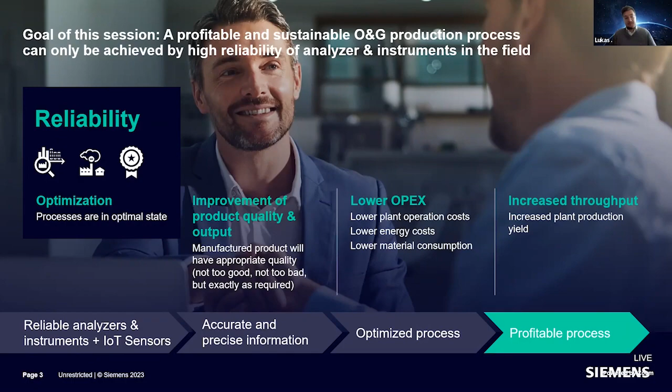So any process control relies on information provided by sensors, classical information, temperature, pressure, flow, level in the plant, and information from gas and liquid analysis of the composition of different measured components. So you can really optimize your process. You can control if your quality is good enough, if you fulfill environmental requirements. You can check if your explosive gases in the process are too high, for example. So we need every piece of information for a process, and we have to make sure that the process control can rely on this information.

I often see in various plants that there's some kind of misunderstanding. Process control expects this information. On the sensor level, it's not possible to provide this information always accurate, always available. So process control starts to ignore some information, which reduces the quality and quantity of information used by the process. And of course, in the worst case scenario, this has a negative impact, because there was a reason why these sensors were installed in a process, why they were purchased by someone.

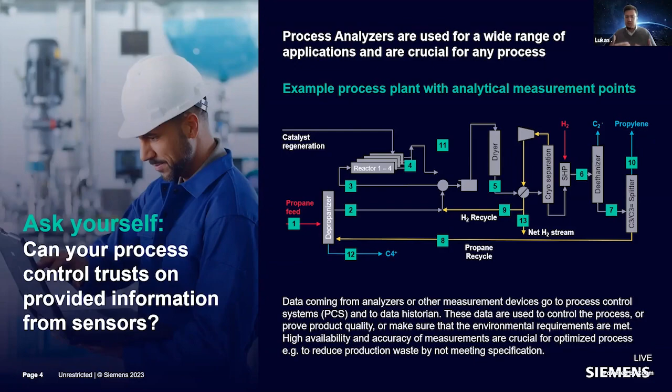So if the process control starts to lose trust in the provided information, this will have quite a crucial impact. So I say today, most of the processes in the world cannot really trust the sensor information in the field. And that's from several perspectives. We have sensors which are sometimes failing. Information is not available for the process. The typical example is run-to-failure: the sensor is broken, control doesn't have the information, and it could cost you millions.

We have sensors out there which are very, very complex, and we will see it later. And they have to measure very accurately. So they're measuring parts per billion or parts per million. So if they have only a small deviation, the information is not really usable by the process.

So if the measurement is not correct or not close to the reality, it's a problem, right? And of course, many sensors are impacted by the environment. I saw sensors there having problems with humidity, with dust, with ambient pressure. So all these topics also impact sensors.

So if you have unreliable analyzers, instruments, or other sensors, you have problems. The process is not running in an optimal state because your process is working with wrong or missing information. The quality is not good. You may have higher operational costs, or your process yield might be lower than expected.

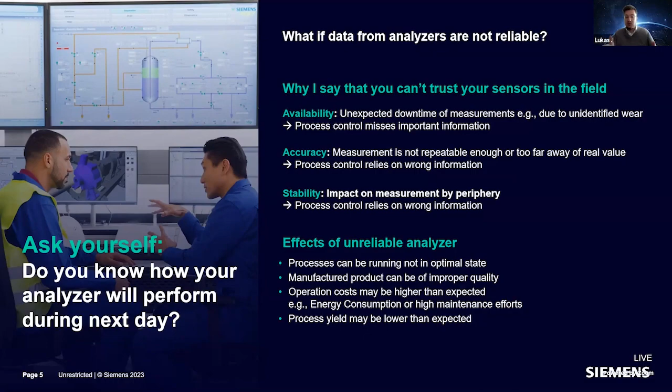So I want to give you 4 examples of what we can do on a sensor level in the oil and gas industry to optimize the information provided by sensors and to contribute to process optimization. The first topic: we had a customer with gas analyzers and liquid analyzers in the field in one of the big ethylene plants worldwide. And there was a topic of accuracy. We will come later to what exactly it means. But first, let's look into the process.

In many processes, we have the challenge between quantity and the purity of the produced chemical composition in the end. If we produce more, the purity goes down to a specific point, and that is a challenge we have to solve. Of course, we want to improve the quantity or the quality, depending on the product. But if we want to optimize the quantity, we have to make sure the product still fulfills the minimum quality specification.

And we often see that customers define their process set point with a high safety tolerance, in such a way that they know the sensor is maybe not providing exactly the information they need. I maybe do 10% additional on top of that 20%. So I have a big space, because the process information is varying. And they drive the process like this, and it's working, it's fine. But there's a big gap of information not used.

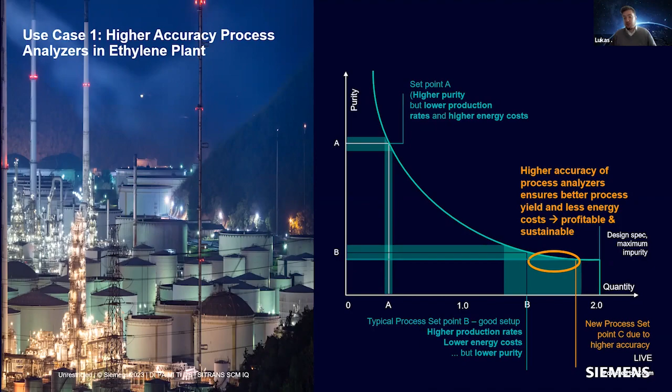So let's look into one of the use cases. For example, a gas analyzer in the field, which is measuring a lot of compositions. This kind of analyzer has to be checked on a regular basis. This complex device has to be checked every week at minimum, sometimes even every day, because it is impacted by many different conditions. You have to ensure the measurement is accurate. If that's fulfilled, this gas analyzer or liquid analyzer provides really helpful information for your process.

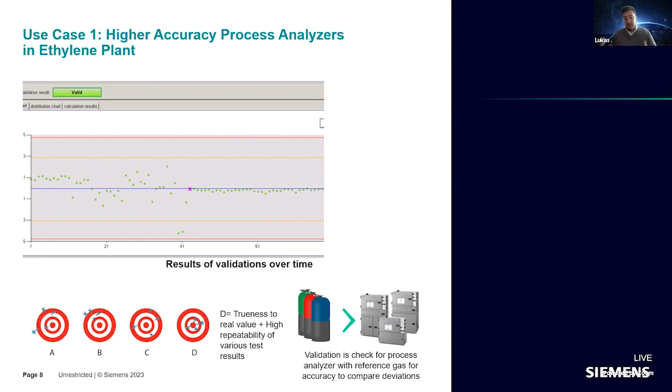And what we often see is that we are far away from the real value of the process, and the measurement is not repeatable. So what we have done with this customer is first optimize the way he checks the accuracy of his analyzer. We optimize the way he provides a reference gas to the analyzer, to really check how close the measurement from this analyzer is to the known composition in the gas.

So we are optimizing this task here to do that in a frequent way and often every day. And then we are applying statistics on this collected information, using the potential of statistical quality control. So different control charts like CUSUM, EWMA, Shewhart charts known from the process control side, applied here on quality data, and applying different statistics well known from statistical process control, rules like the Western Electric ones,

as an example. We are applying this statistic on this data, and what we identify here, and you see it in the screen, is this pattern: we have here a really abnormal pattern of data, right? The green points are validations every day. So we are seeing this data fluctuating a lot, which would normally not be recognized by any human technician in the field. But software can identify it.

If you have 10,000 of these routines done every day, a human technician cannot do that. A software can do it, and the software recognizes here, hey, we have really an unusual pattern, right? Fluctuating points up and down, sometimes not really normally distributed. And then, of course, we see the first points are violating some limits set by the user, so it's getting

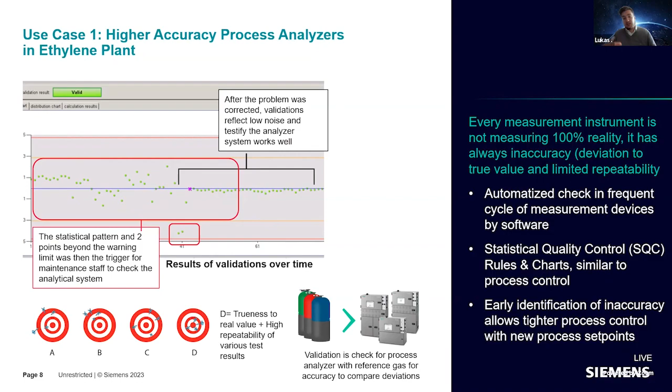critical. Normally, the process would just run with this information. The analyzer result could not really be used because it's not accurate enough. So the process would maybe stop, maybe ignore the information, maybe work with wrong information. So this would be one of the problems we see. And with a predictive maintenance approach, you can really identify this type of issue in the field.

And what we have seen with customers using this approach only for gas and liquid analyzers in the field: they had savings of more than several million euros per year, in such a way that they could improve their process output. So optimizing the accuracy of complex sensors in the field can provide several million euro higher process output every year.

And the cost of the implementation, we are talking about 100,000 euro, maybe 200,000 euros. So far, far low for the hundreds and thousands of sensors in the end. So we see here within the field of sensors a value add: you can optimize the process output by 3 million euros per year, reduce maintenance efforts and increase availability of your assets.

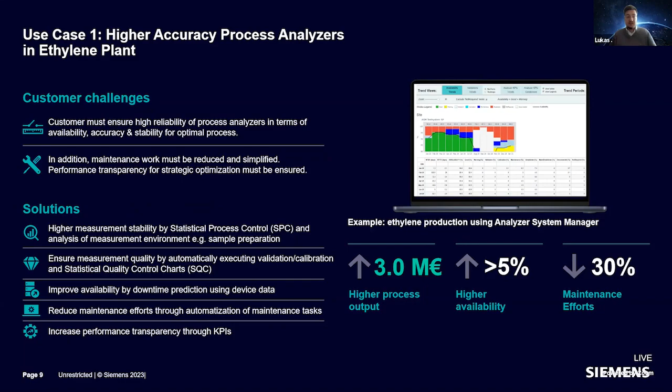Second use case, emission monitoring. A well-known topic at the moment is sustainability. Everyone talks about it. Every government in this world is setting up new rules for monitoring emissions in the industry. What many users don't know, there are very complex measurements available, called continuous emission monitoring systems, which are implemented in most of the refineries worldwide.

These systems are very crucial. The government expects, for example, 98% availability of this measurement. And if you fail to provide this information and document these measurement results, to prove that your plant is working according to environmental guidelines, it will lead to heavy penalties and, in the worst case, a plant shutdown. So this big sensor, it's not a small sensor, it's a very big and complex sensor system, is providing really mandatory information for you.

For the last 20 years, it was still done run to failure. Sometimes spare parts were at the warehouse, sometimes a service technician was there, with a lot of costs for everyone. And when they suddenly failed, there was a big issue because these sensor systems are very complex. They are not just plug and play. So you cannot just install a new one. You have to have experts for that kind of measurement.

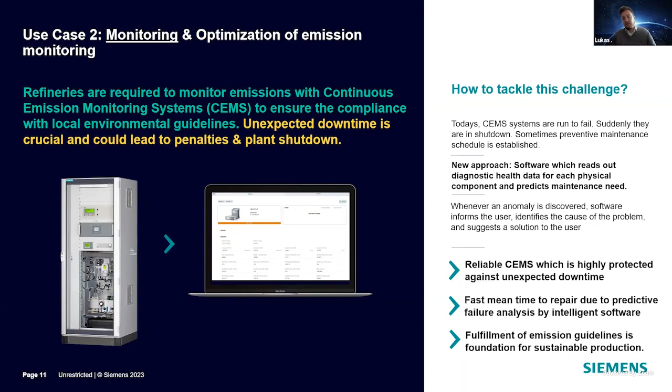We'll not deep dive into that, but for example, we have done it with an emission monitoring analyzer here, where it has specific physical components. One instrument consists of various sensors, so it's a combination of various measurements at once. It has internal sensors, temperature measurement, pressure measurement, electronics, voltage measurement, and so on in this complex device.

And with the help of experts defining rules, data science, statistics, and artificial intelligence, it is possible to extract information out of the sensors which are not used at all today from these devices, and really predict the failure of any physical component. So instead of having often 95% or 98% availability, you can have 100% availability of the sensors, which is quite crucial.

And some sensors like that in the field have only 80% availability. So there's a high potential of improvement in the field by applying digitalization and data science on this information. Using more information out of traditional instruments and analytics in the field will provide your process additional value add.

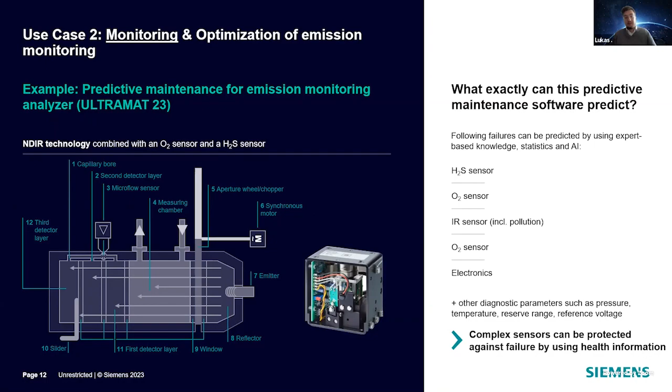This was about monitoring, and what we see as a trend is to model processes. Everyone speaks about it also within this conference. So there's a potential in modeling processes. In this approach, we have modeled the emission output of a complete plant. We are collecting all the available sensor information, defining specific models defined by experts supported by AI, and we are predicting emission values like CO, CO2, NOx, and so on.

Information every government wants to have documented and monitored. So we can really see what happens with the emission of a plant if we are, for example, increasing pressure or flow in the process, to simulate whether we can achieve a higher process output while still fulfilling environmental guidelines, or the other way around, how we can keep the process performance like we have today but reduce emissions.

And this is possible by building up a digital twin of a process, by simulating various process operation models, which is kind of a new topic for everyone in the oil and gas industry, but it's becoming more and more important because the pressure from environmental guidelines will increase every year. This is something which is quite clear.

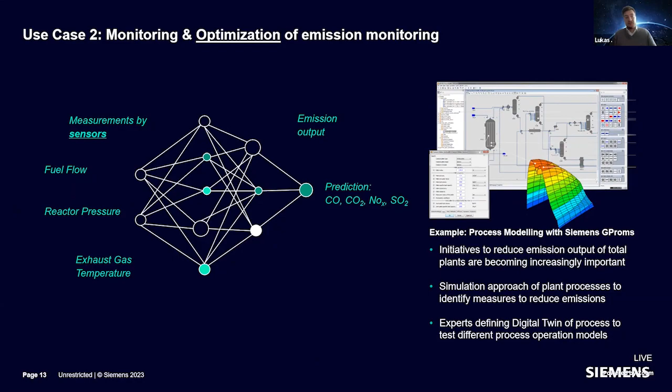The third example a customer came to us with was about remote control of pipelines. There was already a presentation about remote access, so I will deep dive more into the use case. The challenge was, we have an oil and gas pipeline with sensors mounted for pressure, temperature, and so on. But in some cases, they are not connected to an overall monitoring system. Not every sensor is connected to the automation system, for example.

And this quite often means effort, right? Because you have to go a big distance with a service team in case of non-availability of this information. You maybe want to remotely monitor the sensors which are not connected to the automation system. But first of all, you want it available for your service team, so that you always have access to this information and get automatically triggered by software in case of any downtime of these devices. So you can really plan your service activity.

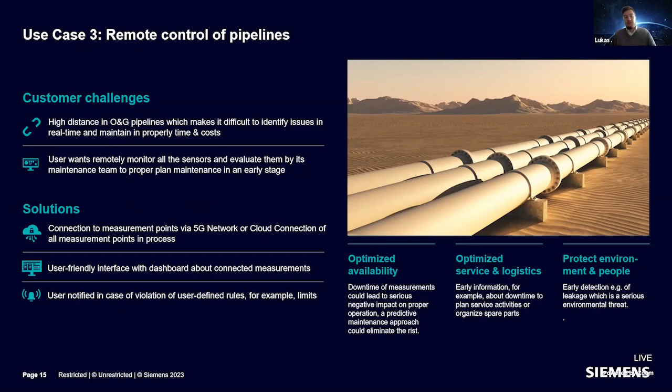In the best case, you get the information in a predictive way and then go with the right spare parts to the sensor site. Again, the sensor information there is very special. In some cases, it's the classical sensor information, flow, pressure, temperature, level, which might be usable or maintainable for a customer, but in some cases the devices are more complex and vendor service needs to be ordered at site, so there are many topics here. Here it was natural gas transportation.

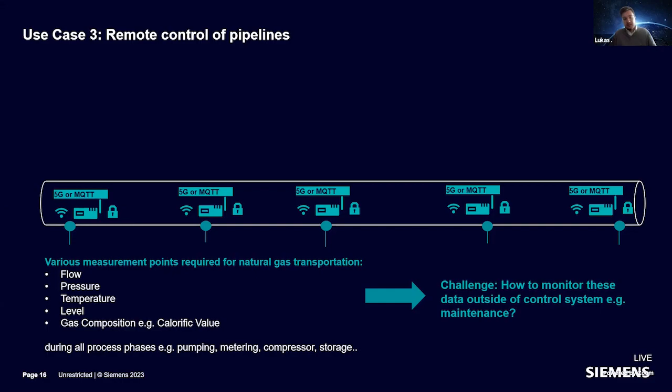We had several sensors, and the way it was possible to monitor this information was building up a 5G network all over the plant, using a classical 5G network, also enabling a cloud connection. Other connections are also possible, like LoRa, but in our case it was a 5G network. Then we collected the information from the sensors and provided the pipeline operator and the service provider the information in a dashboard.

What is the current status? They got the information from every sensor if there was any alarm, and combined with the predictive maintenance approach from the last example, they could really predict what happens. So you can connect hundreds and thousands of sensors to one system, separated from the control system, to make it available for your maintenance team to track the performance of these sensors in the field.

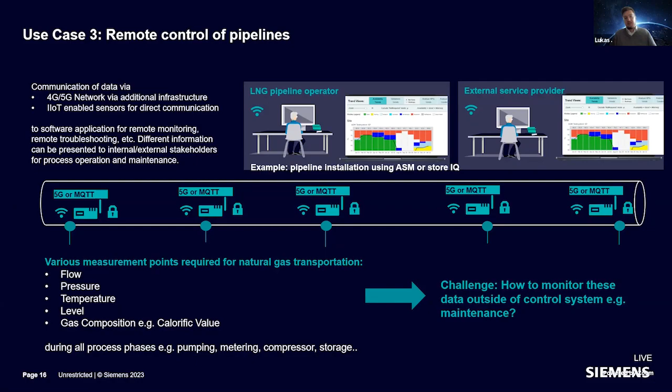Last topic. The last three examples were about classical instrumentation analytics in the field, which is available in every plant, connected to the automation network in most cases, and providing information.

But it was more focused on which information you can extract on top of that, which information you can use additionally in a more digitalized way, and which information you can use for optimizing sustainability. This topic here is a use case about an IoT sensor.

So what we have here is any kind of rotating equipment in the field, for example, a centrifugal pump upstream, which is available and which of course could sometimes fail. Not often, but if they fail, that's a problem. So you need new IoT sensors, because the traditional sensor approach would be too costly to install. So you need a low cost, easy to install sensor with enhanced communication variants.

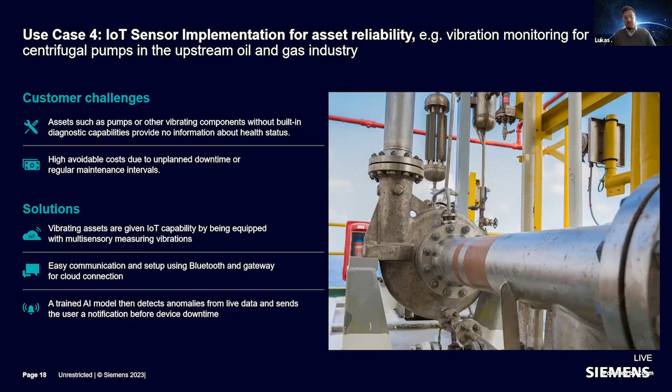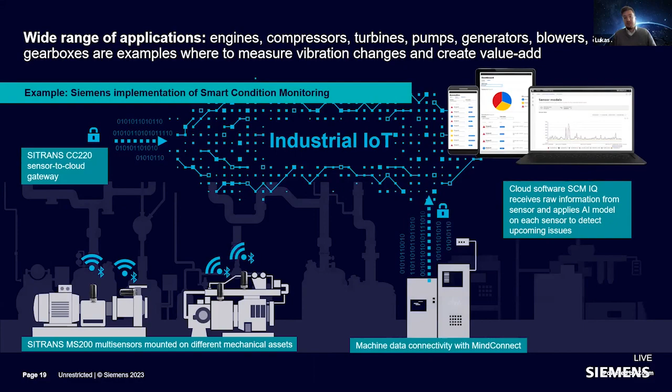So what we have done here is to bring a multi-sensor on this centrifugal pump, which is measuring the vibration of the rotating equipment, the overall vibration, or temperature, for example, and is communicating this information to a gateway. In this case, it was via Bluetooth, and then sending the information to a cloud-based software, which is applying artificial intelligence on it and is monitoring how the sensor is developing.

So this sensor sends the data, then the AI model will be trained based on the collected raw data in different operational stages of the rotating equipment piece. And when the AI trained model is finalized, then the model runs and it informs the user whenever it happens. The sensor itself is only a small €100, so very, very low cost, very easy to use. And the complete raw data are used here for AI modeling.

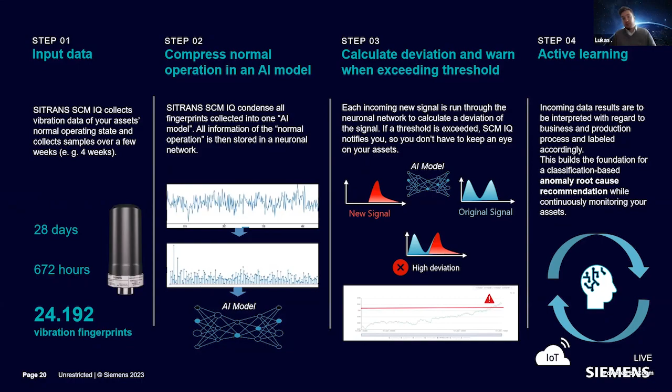So this was also one of the topics. In some AI models, it's better to have really detailed information, not only the single vibration monitored result, but also the complete frequency bands and so on. And also using here a sensor with a high battery power support, so a sensor which can run for 2 or 3 years in the field without the need of battery replacement. This was one of the requirements here.

So I'm coming to the end of my presentation. I rather focused on giving you some insights in the field of sensors and not deep diving, that we can do in breakout sessions and so on. But my goal was to show today how reliable sensors are crucial for your process to optimize the overall process in regards to efficiency and sustainability.

And we see we have different challenges for the sensors. They could fail, they are not measurement accurate, for example, they are impacted by the environment. So we have to take care of them with the usage of digitalization. So digitalization and data science can provide a value add. That's clear for everyone who is there. It can also provide a value add in the field of sensors for the overall process. We saw that in the first example by having a higher process speed worth several million euros per year.

And also, besides the classical instrumentation and analytical measurements, there's a need for IoT sensors, for vibration, for energy, for temperature, and so on. So the demand for IoT sensors will increase. And for example, the vibration monitoring use case for rotating equipment can be a really additional help for process operation to make sure that every asset in the plant can run in good shape.